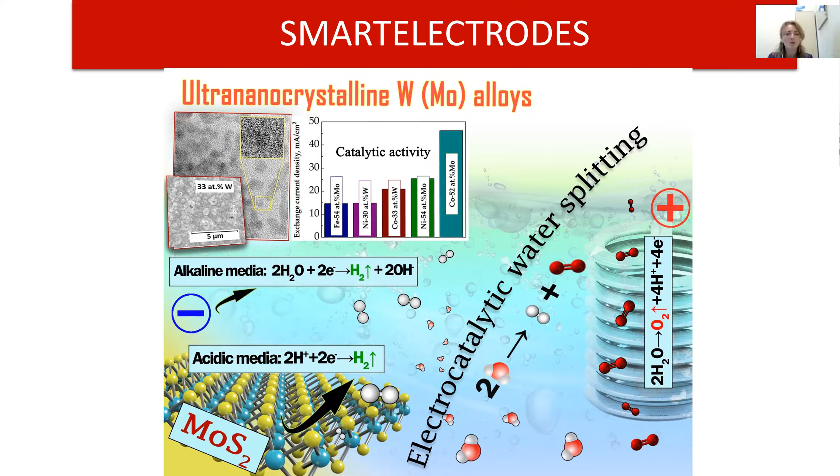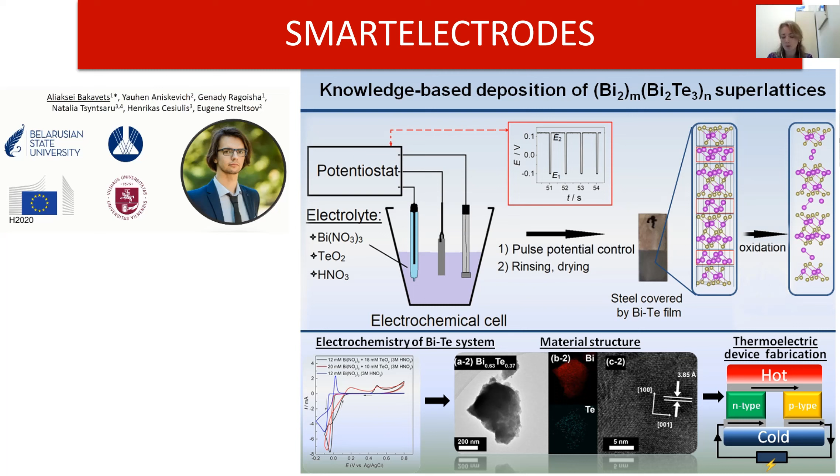It's a pity that, because of recent events, the European Commission restricted the participation of our Belarusian colleagues in the project, but we are really thankful to them.

Other topics I covered in our project were about foams, because it's smart and multi-scale. So we used not only flat surfaces, but also tried to develop 3D surfaces in this project, for example cobalt foam.

In different solutions we used different approaches, for example cobalt chloride or sulfate solutions, and there were really different results between them. In sulfate solution we have a better, more developed 3D structure.

But nevertheless, if we added isopropyl alcohol, we get this nice cobalt forest in cross section, as we call it, and it can be used as a 3D catalyst or 3D sensor, or in other different applications.

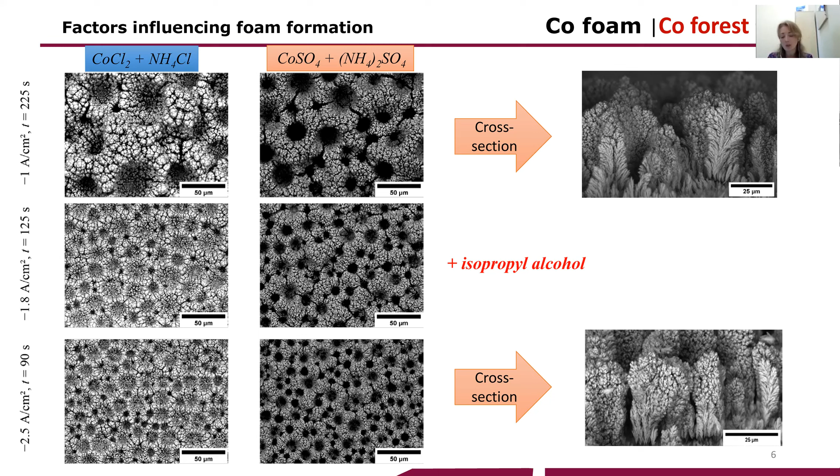In one example, we used this cobalt foam and modified it by cyclic voltammetry, giving 100 cycles, for example in hexacyanoferrate solution, so we can achieve this modification of the foam.

This modified foam can already be used as a sensor for detection of chlorine in water. This is especially relevant taking into account the EU Green Deal, so this is a good opportunity for green technologies, should I say.

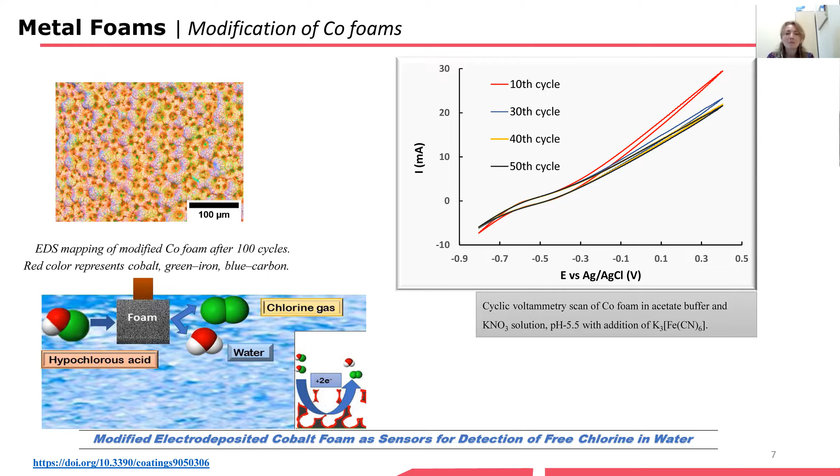Also, we worked with foam in another direction, for the Fenton reaction. The Fenton reaction is used for degradation of dyes, using iron 2+ ions in the presence of peroxide.

We showed that by applying the foam, for example with an iron bar, reactions that take minutes or hundreds of minutes can be sped up. So like 40 minutes when applying a foam, we're already dealing with seconds. It really depends on the structure.

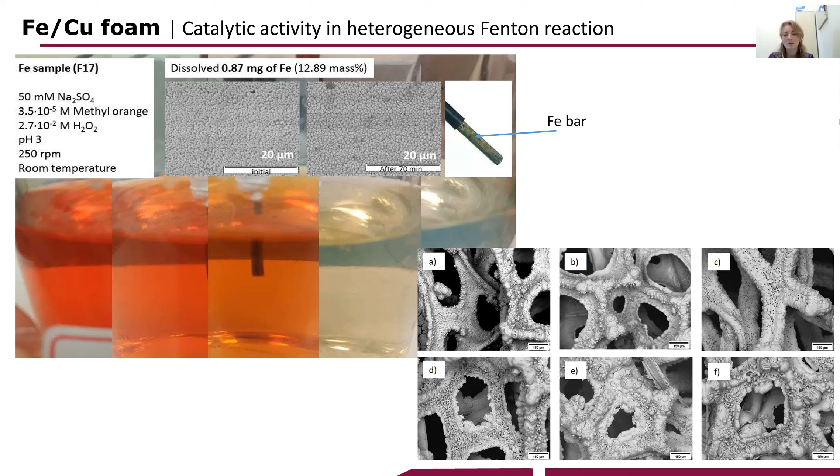And this was also a nice result in our group, in our project.

Now, I need to present something about our companies in our project, two companies, one of them being Elektronikos Perdirbimo Technologijos, or Electronics Treatment Technologies. In our project, this company, based in Vilnius, deals with metal recovery of precious or noble metals from electronic waste. And why is it important?

Because, of course, it's important for rare materials that are more and more pricey these days. And with the last crisis in Europe, and not only in Europe, these rare materials are even a bit more costly, I suppose.

So in our project, we also collaborated with EPT company. We were devoting our task to electrowinning. What is electrowinning?

Electrowinning is recovery of metals. It's the same as electrodeposition, where you're using some current or voltage. We already have a solution like multiple metal ions, and by applying some current or voltage, we can recover these metals from the solutions.

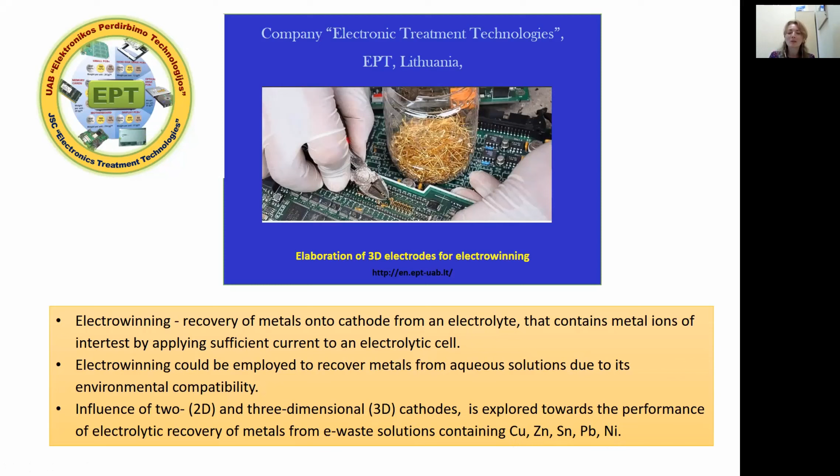Namely, the influence of 2D and 3-dimensional cathodes in exploring electrowinning of metals, so-called base metals, from electronic waste treatment. So this is called base metals.

So the setup was like we were applying really high voltages - I mean, not really high, but okay, depending. And it was 60 degrees, and it was a 2 electrode system. And as a cathode, that was a copper foam.

It is not produced by us, but it's a big sheet that was bought from a company, and a stainless steel bar as a reference, like a 2D material. So we performed several analyses to make sure what we obtained as deposits.

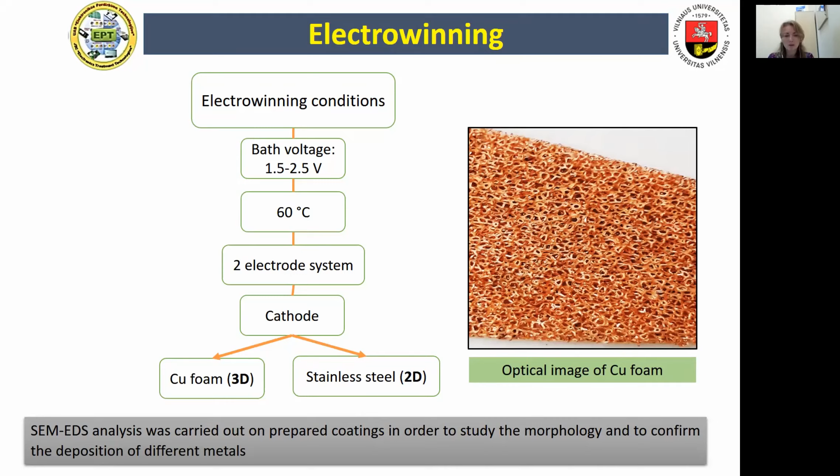So yeah, the process is expensive, but not so expensive as trying to buy new ones that occurred from nature.

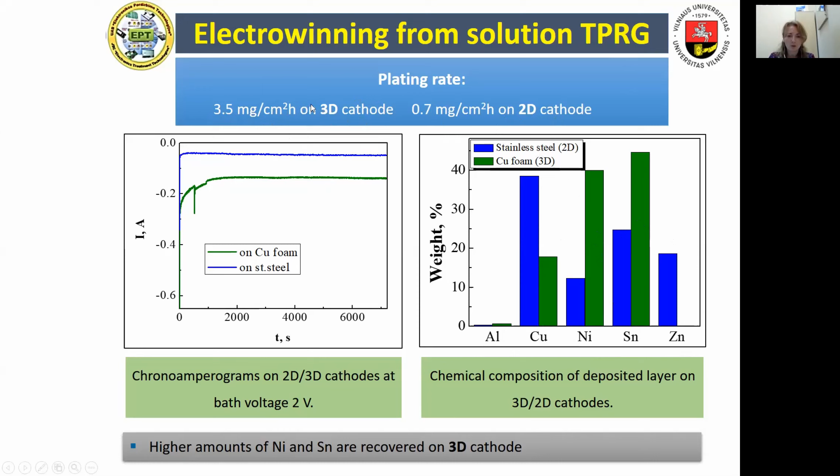But you can see, for example, on 3D cathodes, the plating rate is much higher usually than on 2D cathode. So this is average, at 2 volts.

And you can see that the deposits are rather thick or well adhered to the surface, even in foam or in steel.

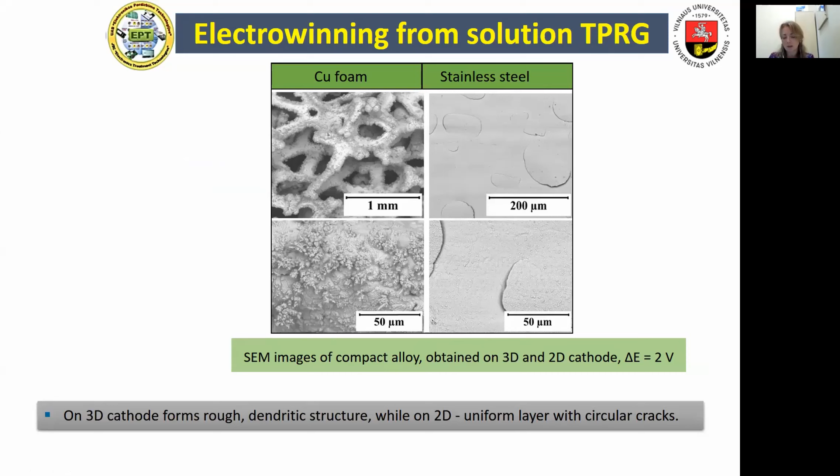But of course, from this solution, this condition was very good to have a high extraction or electrowinning rate, but the leaching solution was not always the same.

So, for example, in a different solution containing a bit already of iron and a different amount of base metals, they are practically equal, a bit higher still in some cases. But for example, for iron and tin, it's a bit higher - probably because of preferential kinetics, but also because you already have not so good adherence from this solution.

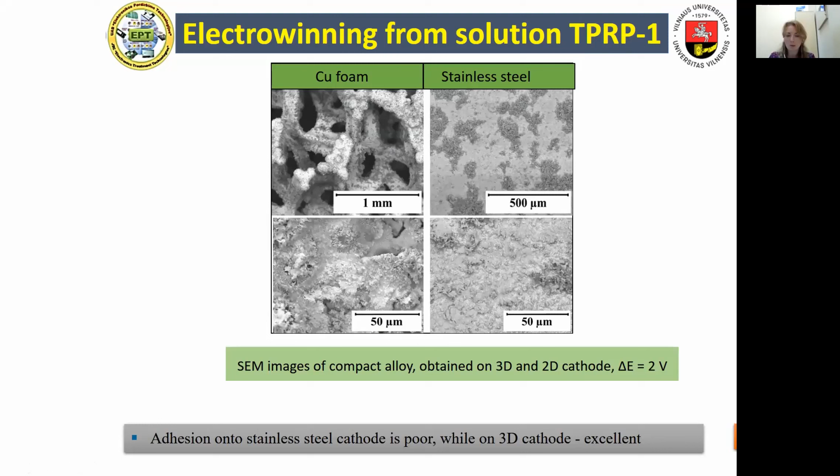So maybe there are some compounds in these leaching solutions that are preventing good electrodeposition. And if we even go higher - because here it was like 2 volts - if we go even higher, like 2.5 volts...

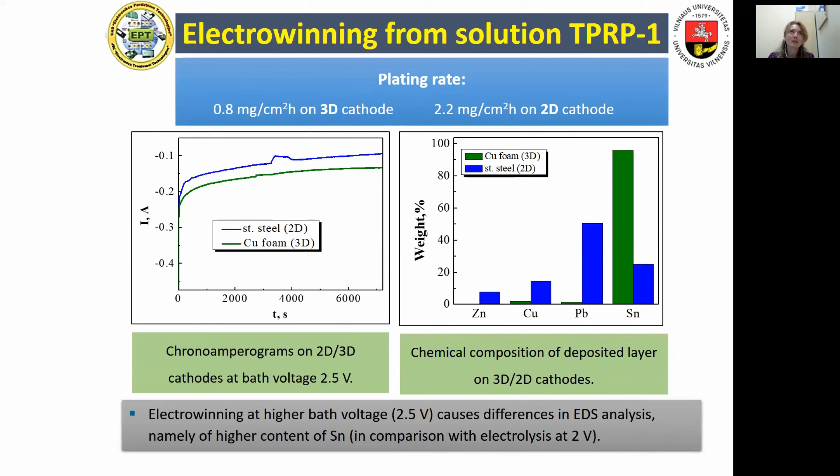So using 3D electrodes is not always good, and that's why it's research. You also need to take into account all the conditions, like voltage and the solution, because some components of the solution can prevent good adhesion and good kinetics.

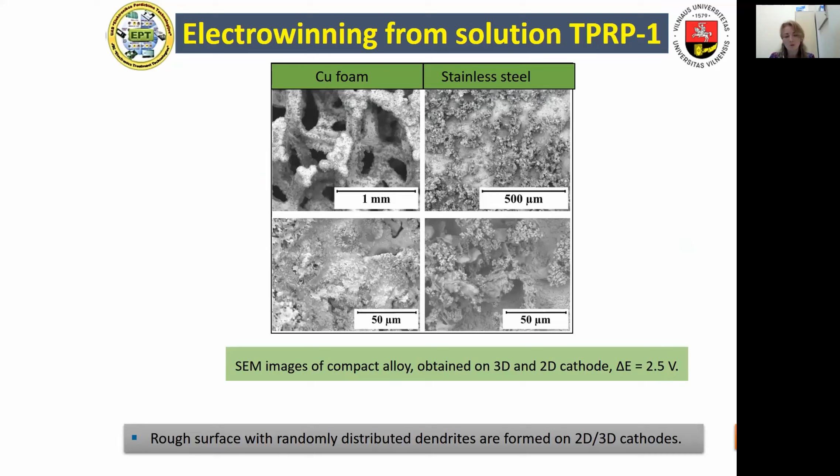And the third solution I want to show here, this is already the case when you have equal practically mostly. You can see that it's barely in the average, mostly equal. So again it's a bit different composition of electronic waste, and you have different composition of leaching solution, and of course deposits are also different.

As you can see from this solution, we already have very non-uniform deposition, like plates, lands, small islands, whatever. So this was really poor deposition from this solution. This research shows us that we need to really take into account the multiple effects of solution, voltage, and electronic waste itself, because it's giving the composition of leaching solution in the end.

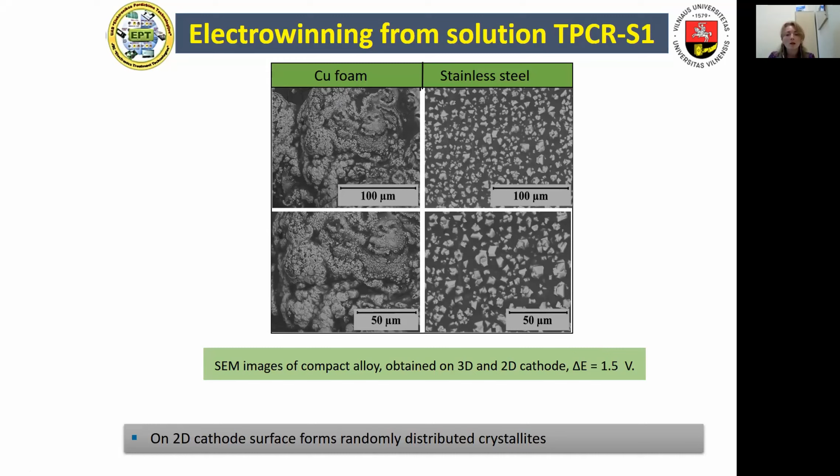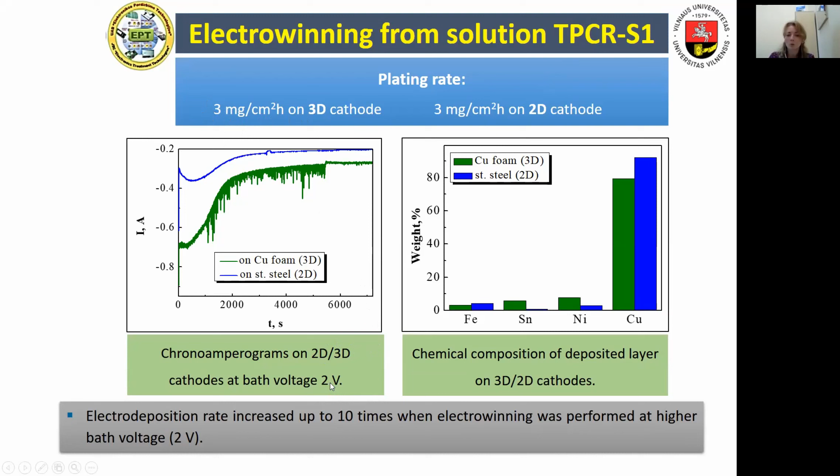And also if you go to high voltages, it's the same. The plating rate is high, it was 0.3 and now it's like 3 milligrams if you're going to 2 volts. But still from this solution, the coating is really powdery and has poor adhesion.

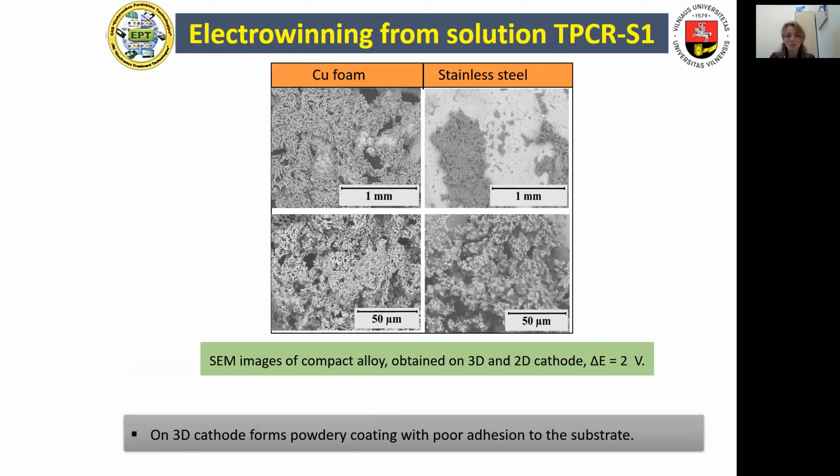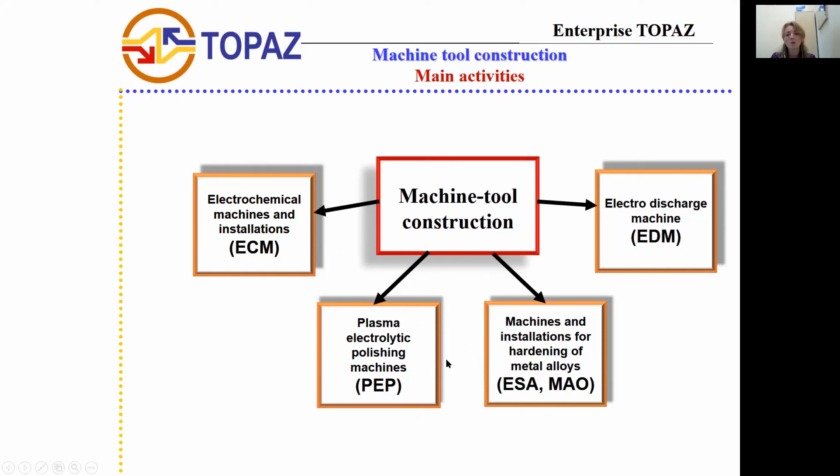So next, I will shortly present TOPAZ company. TOPAZ company works with different activities, but the main activities are machine tool construction under different technologies, electrochemical machines and installations like plasma electrolytic polishing machine, electro discharge machining.

In our project, TOPAZ collaborated with us, trying to assess different coatings by physical-chemical properties, to understand how they can be used in their technologies, if what they are producing is good or not. So these technologies you can see here, and especially I will talk about electrospark alloying.

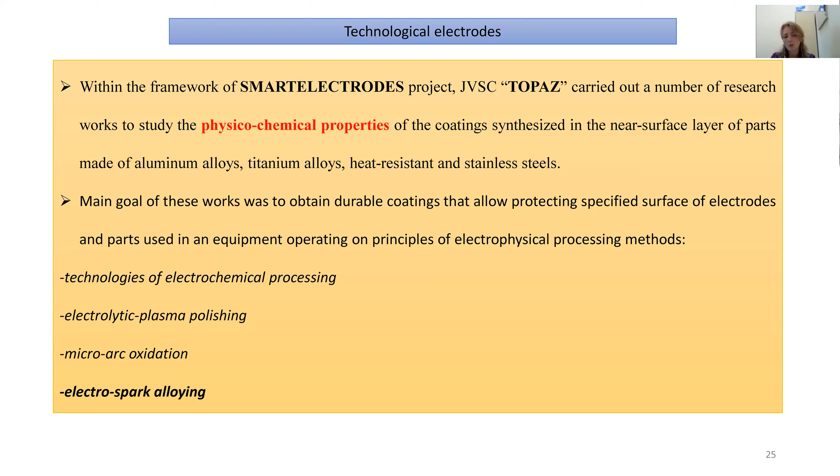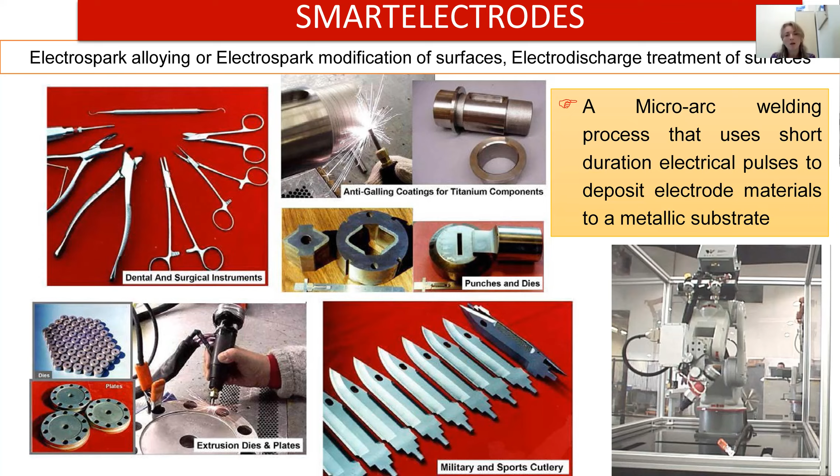You can also see the example of the same treatment in TOPAZ. So here's the process: you first apply a breakdown of the inter-electrode gap when applying pulses, and after this, erosion holes are formed on the cathode and anode.

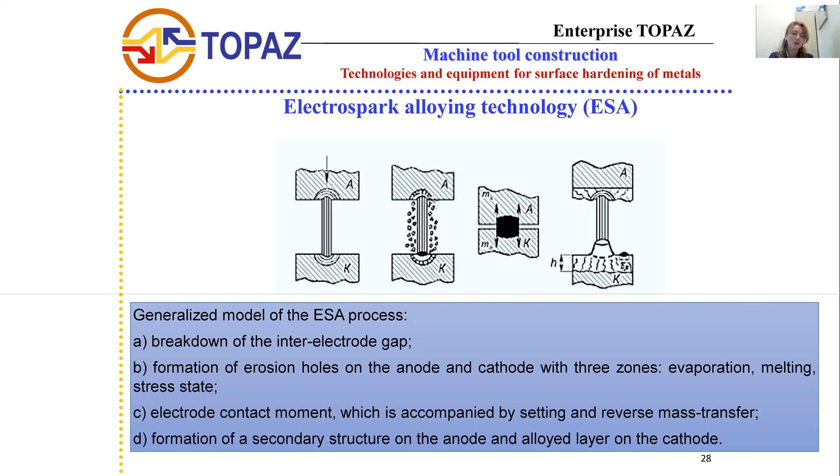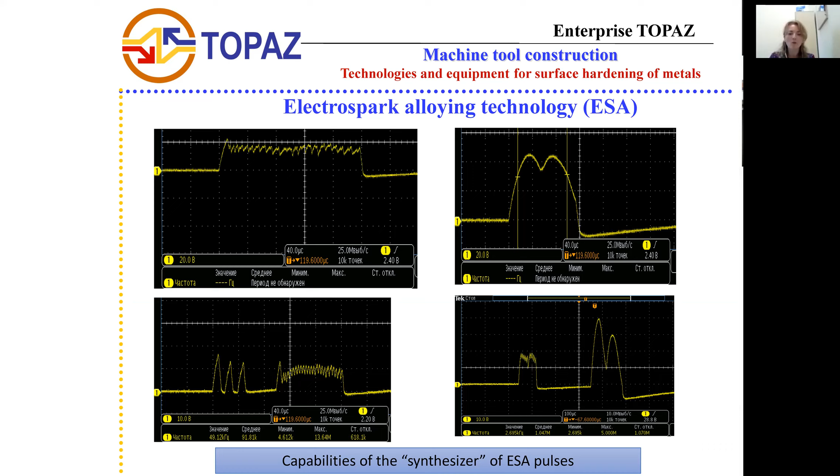And afterwards, you have this electrode contact moment when you go with the electrode tools to this contact. And after this, a surface is already formed on the cathode. So by applying different electrospark alloying pulses, you can form different surfaces.

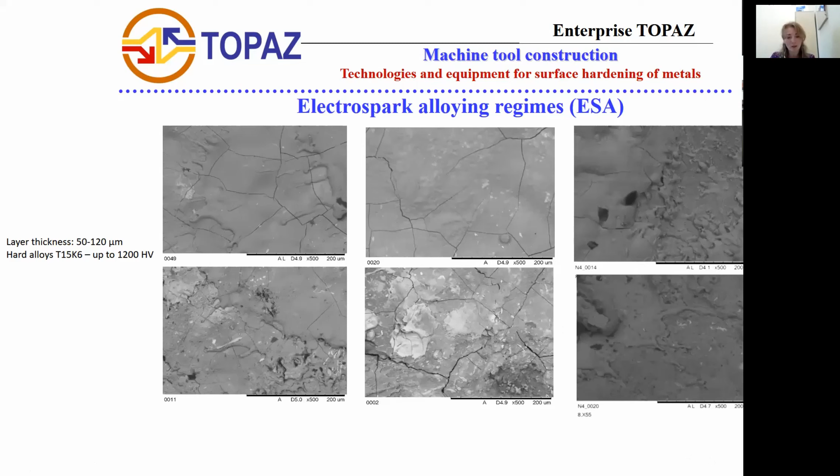This was eventually researched by us, to see which pulses are good and which are not, especially for hard alloys that are really difficult to deal with. You can see that with really hard alloys you can have a lot of cracks, but under some regimes - which I will not show here because it's company private information - you can mostly receive less cracking or practically no cracking in the coating.

So these results were good to apply. They were updating this device in TOPAZ, owing to these results that we obtained in collaboration with them.

To make repairs out in the field. For example, some machine is broken in the field, and you need to repair it there, not taking it into the lab or to the company.

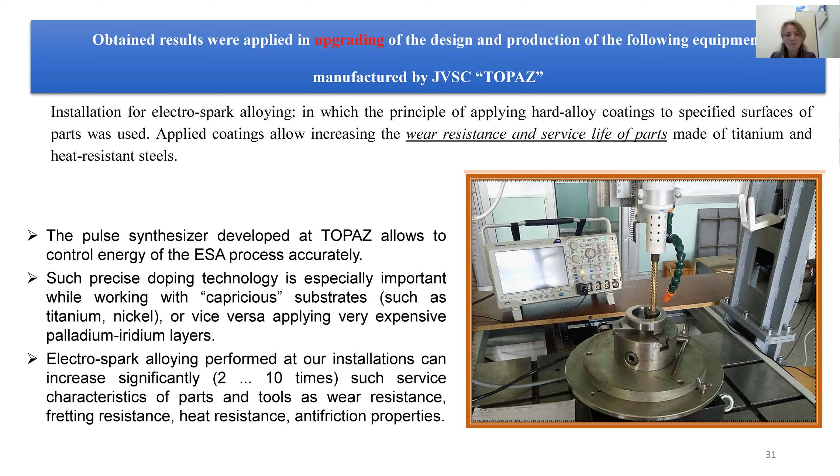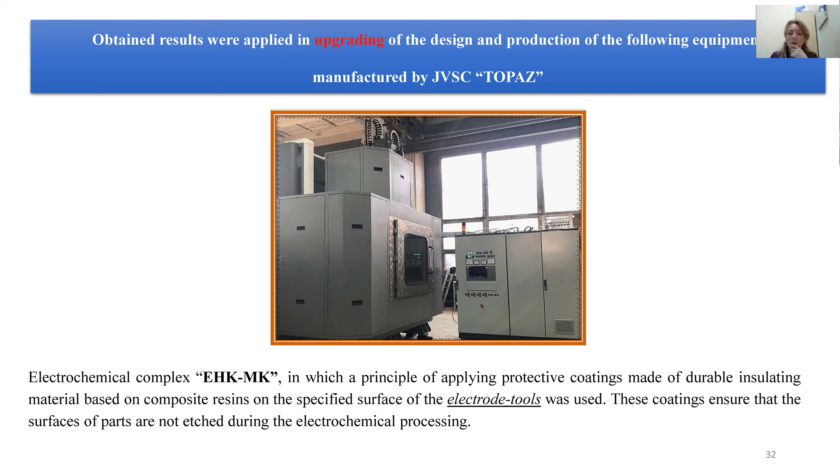So also some of the results were good for them to upgrade an equipment for electrochemical complex, which applies protective coatings made of durable insulating material. So they were also able to upgrade some of the regimes.

This was what I shortly wanted to talk and present of some of our results. And of course, thank you for your attention, for your presence today, supporting our workshop and supporting our projects. Thank you again.

Thank you for nice talk.